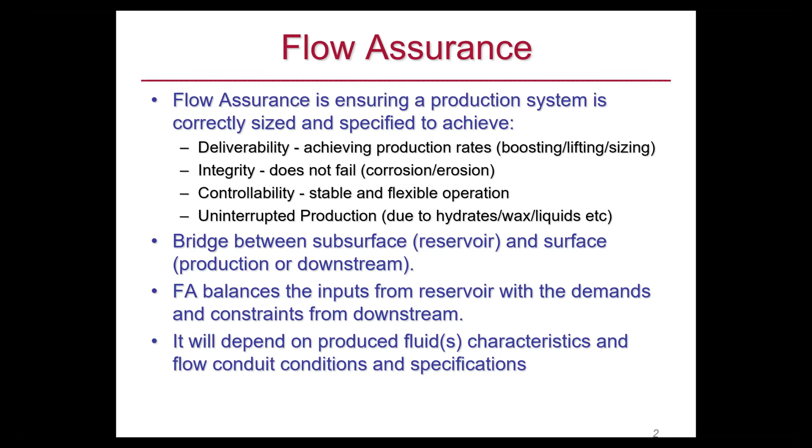So the question for a flow assurance engineer is: do we have gas or oil? Do we expect water production? What lab tests do we need to do? Are the fluids untreated or treated?

Do we need processing? Because obviously you can do processing at the point of production, and then reduce your worries about flow assurance. But most of the time it's not cost effective, especially offshore.

And there is the distance between the receiving facilities and where we are producing - that plays a major role. The longer the distance, the more flow assurance problems you can expect.

And then ambient conditions - what are the different constraints we have? Pressure, temperature, and receiving facilities.

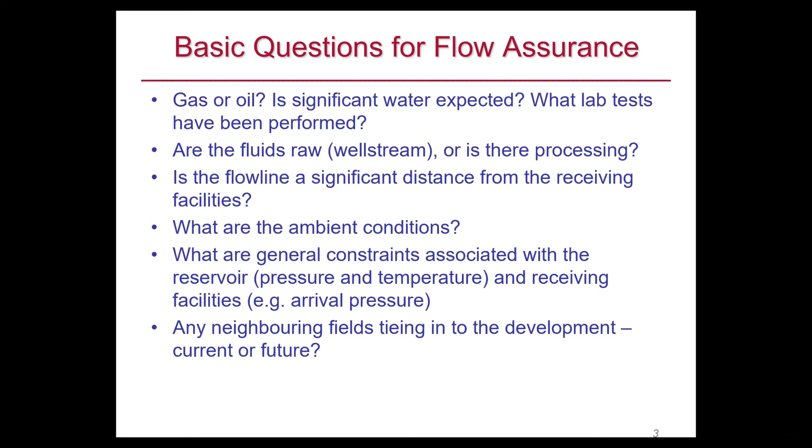And normally, when we have a major reservoir, there are some smaller reservoirs nearby, because you can have different anticlines, and the oil and gas can go to different anticlines.

So flow assurance will include hydrate, corrosion, wax, asphaltene, scale, sand production, and other issues like emulsion and foaming. So you see it is a large area, and it is fantastic.

And you know, that's why when I started my work, it was not called flow assurance. But now I'm very happy to see it as a separate job category, and petroleum engineering is also defined as a different category.

And heat transfer, hydraulics, and then steady state production, shutdown, and startup - three conditions. A startup has different issues, a steady state has different issues, shutdown has different issues. So you need to address all three conditions.

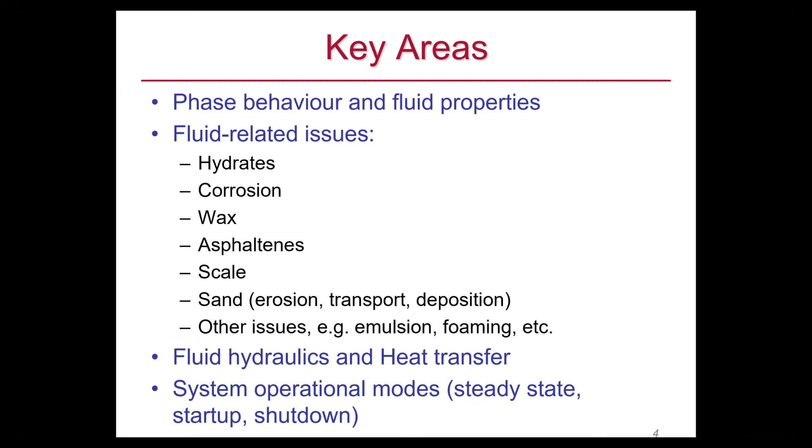And the phase envelope is very important - the fluid phase envelope is very important. So we need to basically plot this phase envelope. Are you familiar with phase envelope?

Yes, we are in the process, yes. And normally, basically, the phase envelope depends if you have the composition. If you have the composition, you can plot the phase envelope. The problem is that for...

components that are heavier than C7 plus, we don't know their critical temperature and pressure and acentric factor, because we need these three parameters - critical pressure, critical temperature, and acentric factor - to model the system. And therefore, normally our prediction is wrong.

And that's why we need lab tests to measure bubble point, dew point, or different properties, and then tune the equation of state to match this condition. So here we are matching the bubble point.

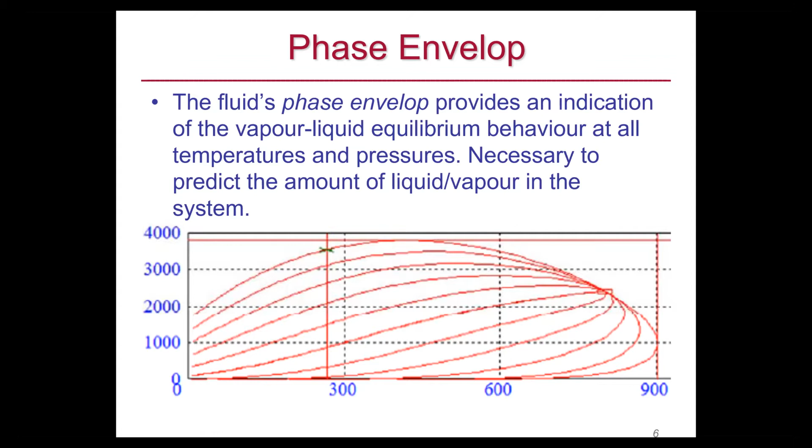It is very important - the first thing you need to do is plot the phase envelope. And then once you know the phase envelope, now you are producing from this reservoir. Reservoir condition is here, initially above saturation pressure, and then it goes inside. When the condition goes inside the two-phase region, the fluid becomes two phases.

Now you have gas, liquid, and maybe three phases. You can have water, or four phases - you can have wax, asphaltene, so you can have different problems.

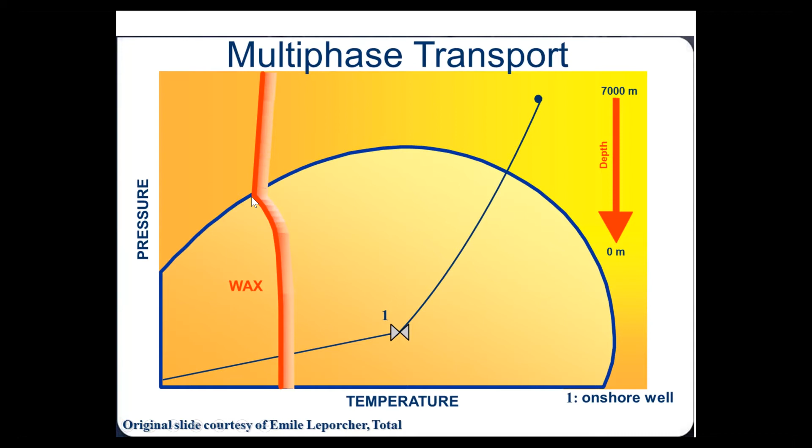So now you have a certain path you have chosen, for example, and you need to plot the wax condition. This is the wax condition, and at the bubble point - that's the reason we need to plot this phase envelope correctly - because at the bubble point, below the bubble point, if you increase pressure...

If you increase pressure, the amount of light component will be increased in the liquid hydrocarbon phase, and that will reduce the concentration of heavy component. Therefore, wax formation will be more difficult, and you need to cool down more.

At bubble point, there is no gas. So when you increase pressure above bubble point, the liquid oil conversion to wax, the volume is reduced. Also, increasing pressure will reduce the volume. If you have a fluid and you apply pressure, the volume is reduced. So you see that wax formation and pressure increase are in the same direction.

That's why you see that the phase envelope for wax shifts to the right, while below bubble point it shifts to the left. So knowing the bubble point is very important to plot this correctly, and that's why we need to first tune the equation of state to match the bubble point.

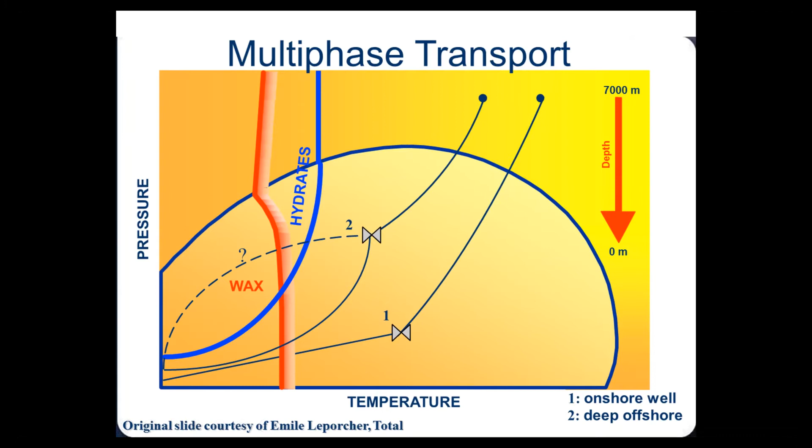Now this is the asphaltene phase envelope. This is upper asphaltene onset, this is lower asphaltene onset, and we need to plot this one too. Then scale formation - these are different scale formations. You need the full figure to predict things, and this is viscosity increase.

Below bubble point, as you reduce pressure, the viscosity increases. So you see that you need to have the prediction for all of this to be able to predict what sort of problem you have, and decide which way to move and how to solve the problem.

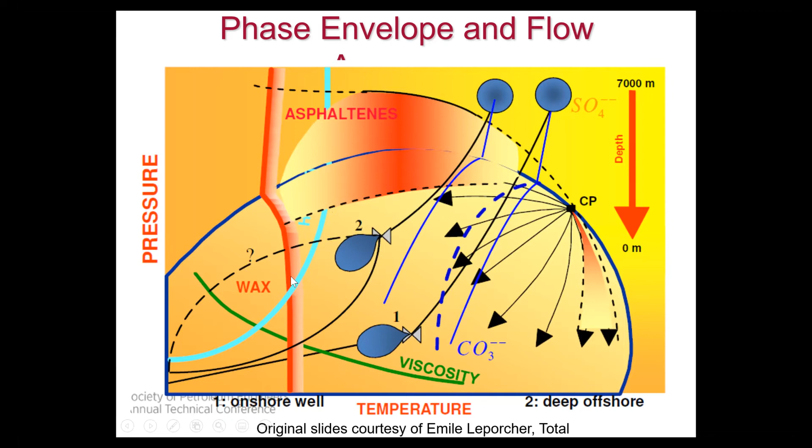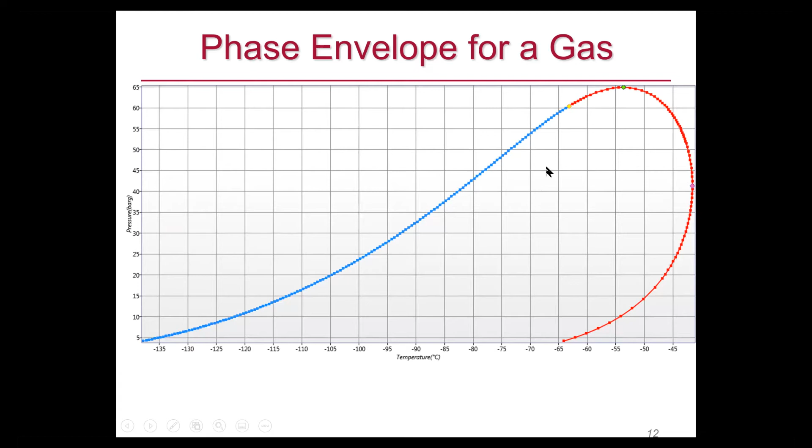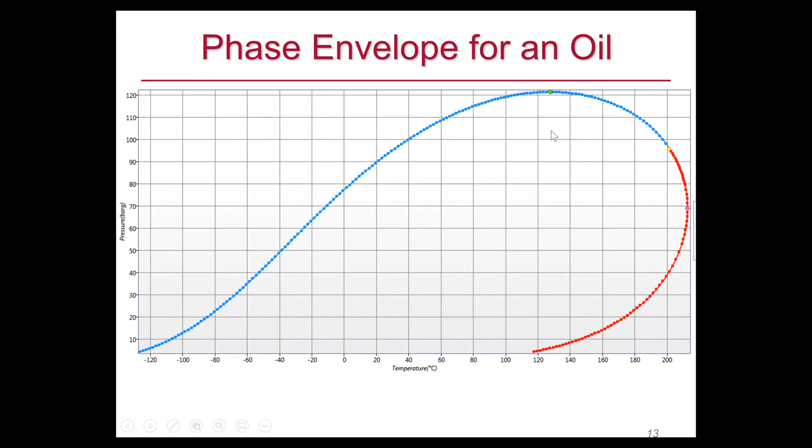And then when we are producing, the pressure will drop. In the reservoir, pressure drops like here, and then as we produce, it moves this way. So we can have all sorts of problems. That's the reason we need to plot this - this figure is very important.

Here you see first the phase envelope. The first thing you need to do is tune and match the phase envelope. That's why lab data is important.

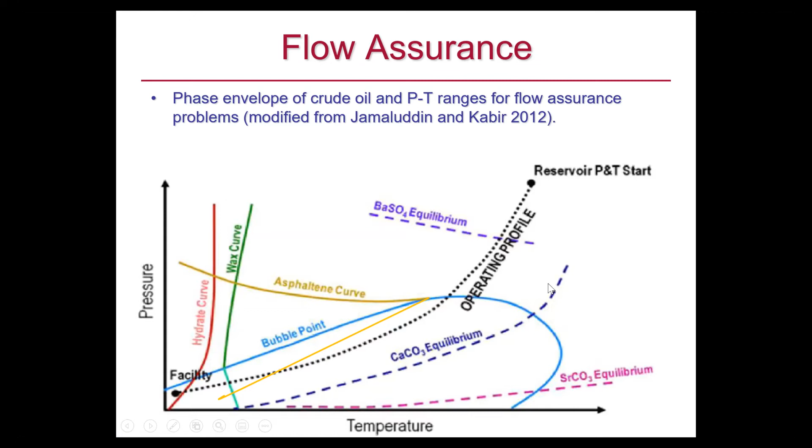You see that here, if you move this way, you have an asphaltene problem, but if you move this way, you don't have an asphaltene problem. At the very end, you might have some asphaltene problem, but also a wax problem, and here you have a hydrate problem. And the operating condition goes into barium problem here, and you don't have the calcium carbonate. You can see all sorts of problems you can have.

Is this clear for everybody so far? Yes sir, I think yes. Excellent.

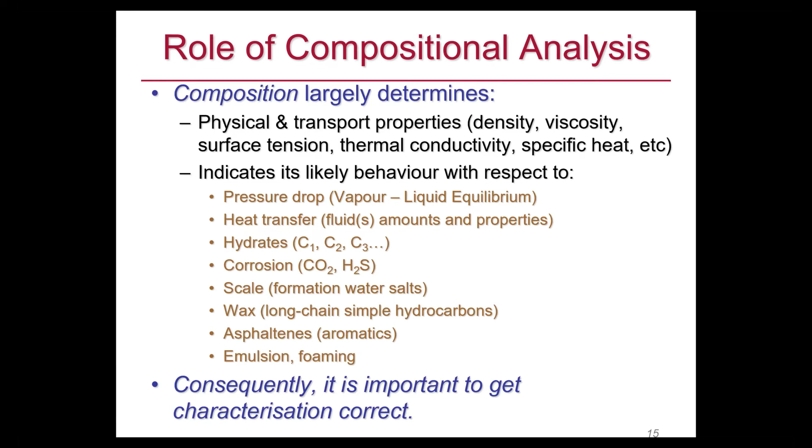So, depending on what sort of problem we have, we need to consider mitigation, prevention, or using inhibitors and things like that. First, the point is that we need to have characterization - grouping the pseudo components into different groups and then defining critical properties and acentric factor to match the experimental data. So here we discuss hydrate, wax, asphaltene, scale, foam, and emulsion.

Hydrate. Hydrates are what they are - components similar to ice. They look like ice, but the difference is that they have a lot of gas inside them, and they can form at temperatures much higher than 0.

We can have hydrate, depending on gas composition, at 20 degrees. So that's the big - there are two big differences between hydrate and ice: hydrate can form at temperature above 0, and it has a lot of gas inside them.

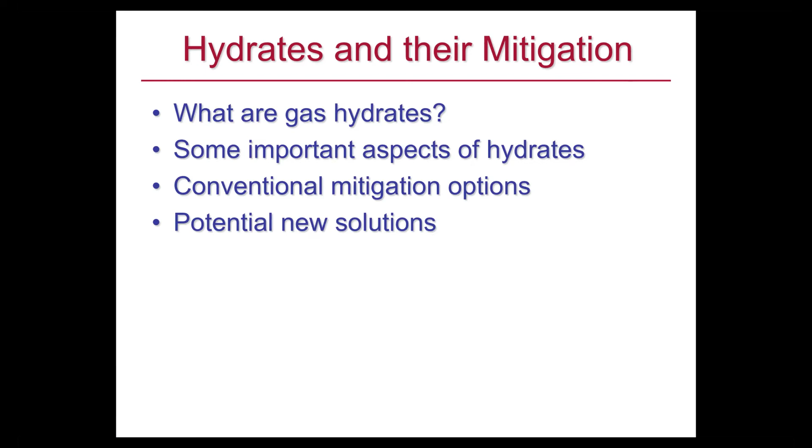Here we discuss the aspects and conventional mitigation options, potentially new solutions. So each molecule, each compound can be in 4 stages.

We know 3 stages, but let me explain. First of all, gas state - when the molecules are separated from each other. When they are separated, it doesn't matter which molecule is there, because they don't have a lot of interaction. For example, water can go inside the gas molecules, between the gas molecules.

In gas state, the molecules will fill the container, completely fill the space available. If you increase pressure, the same thing happens - they will completely fill it. Imagine you have a bottle of water, remove the water, now you only have air there, and everywhere is the same - it completely fills this space.

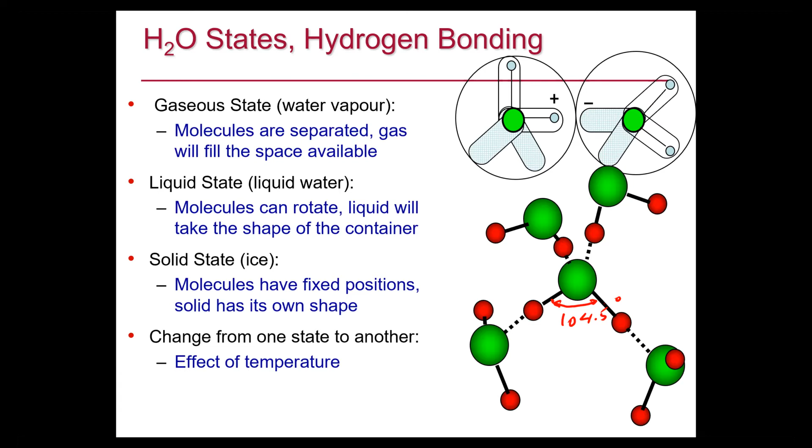So the angle here, 104.5 degrees, okay, so it's like a Lego game. With Lego games, you can make certain shapes, you cannot make any shape. You have certain shapes, and the molecules do not move towards each other.

What happens? The hydrogen bonding force is there, but the van der Waals force depends on how big the molecule is. If the molecule is big, then it's closer. If it is too big, they repel each other. If it is too small, the force is less.

So hydrate formation depends on which type of gas molecule we have. For example, C3 is a good molecule, IC4 is a good molecule - they are spherical, the right size. But N2 is very small, C1 is very small, C2 is better.

CO2 is polar, so it is good. H2S is polar as well, good. They can promote hydrate formation. So the position of this hydrate phase envelope depends on the composition of the gas. Normally the best molecule is cyclopentane, for example, because it's spherical and a good size. But cyclohexane is slightly bigger, so it is more difficult for cyclohexane to form hydrate.

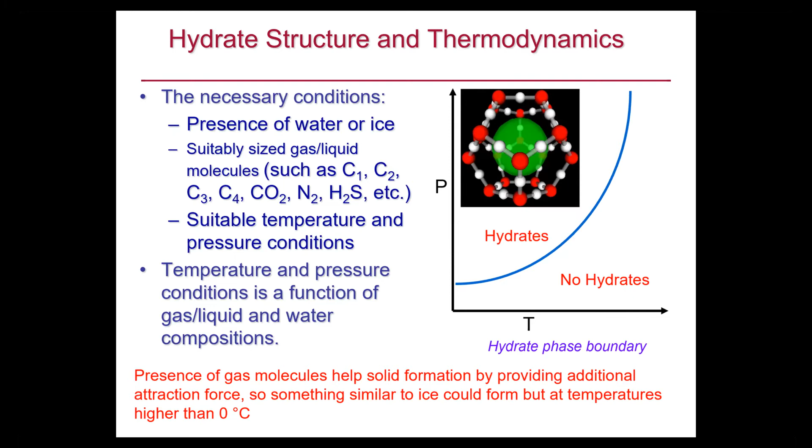So the important point in the hydrate problem is plotting the hydrate phase boundary. And we can do it experimentally or through modeling, or both. We have the necessary equipment and facilities to do that at our university and company.

The connection is gone. I assume you can hear me. Can you see the video? You should be able to see the video now. We can see it, but we can't hear it. No, there's no voice there.

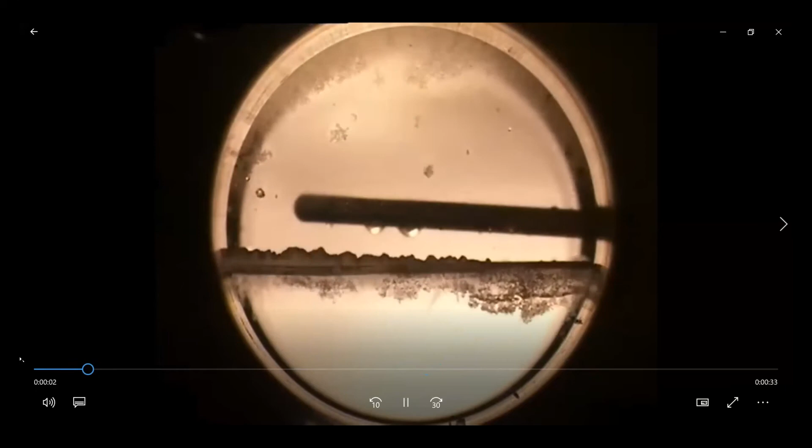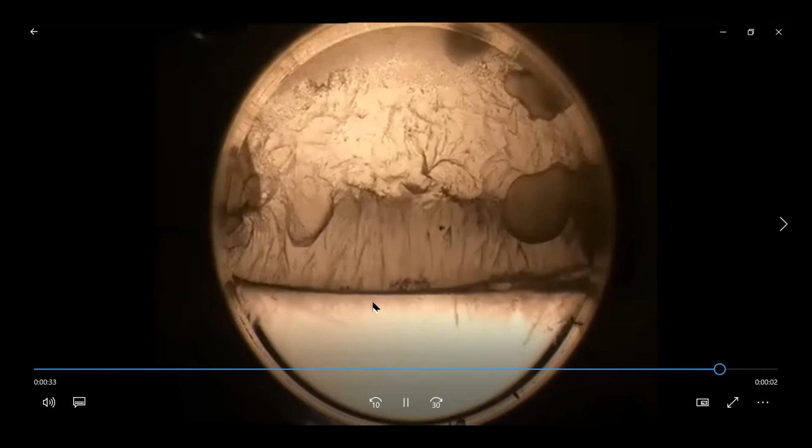Okay, yeah. You see that hydrate is forming at the interface, and here it was wetted by water. But you see that the interface works as a barrier. You see that the liquid remains as liquid water, and there are some streaks going inside, and that's why in shut-in conditions, you might have this sort of condition where the hydrate formed at the interface and works like a barrier for further hydrate formation. And then when you start up, that barrier is removed and it can block the whole pipe.

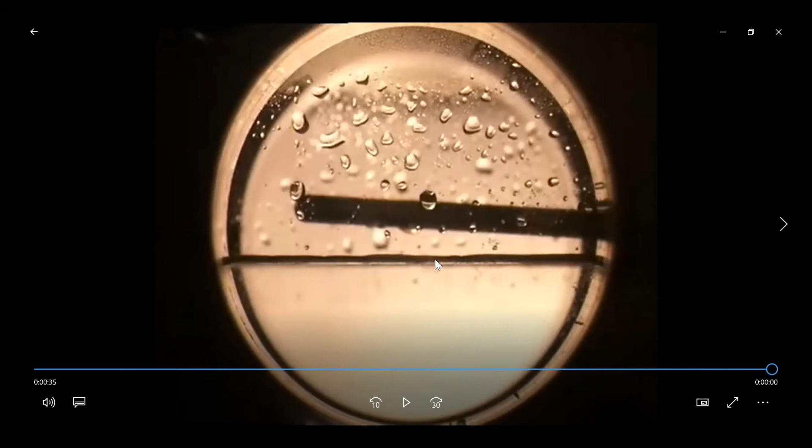And hydrate is a source of energy, a source of energy. So we can look at...

Can you see the video? No, we can hear something, but we can't see it. Okay, one second. The magic of hydrate - now, yes, we can see it.

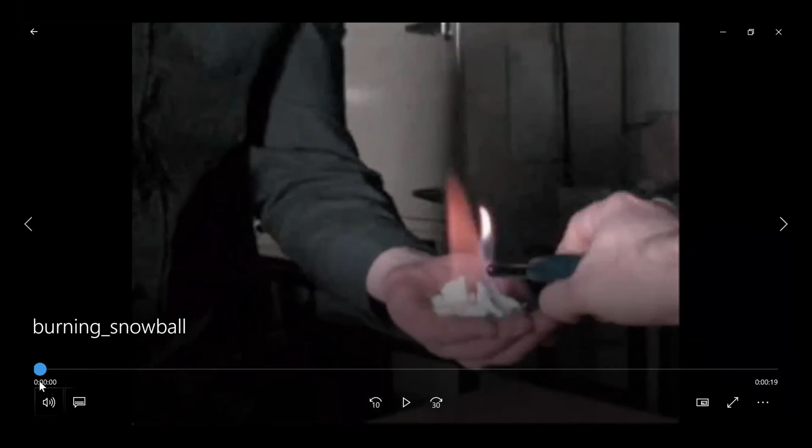I play a role in this video. What is my role? This is one of my staff and students. See that, water is dropping, and my role was - that is my hand. You see, I have the lighter.

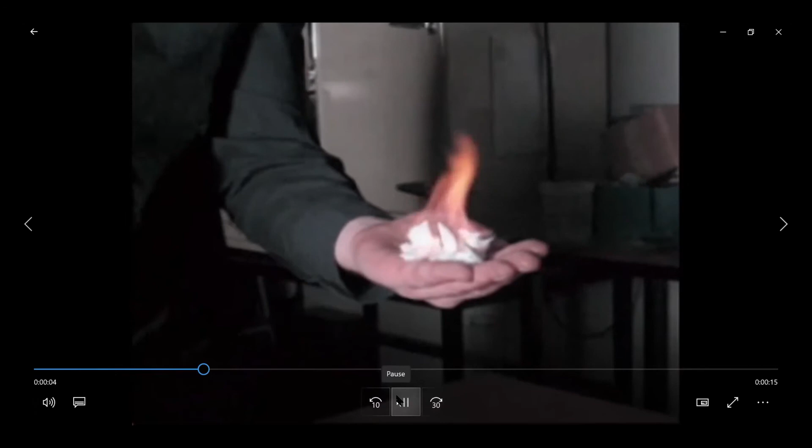That was a program we created for this geology TV channel, National Geographic TV channel, and my friend has a very good Scottish accent, and he did the presentation. If you are interested, I can show you more.

In the 1980s, geologists started scanning the continental shelves and slopes with side-scan sonar. They found them riddled with strange features: giant craters thought to form when gas suddenly escapes from the sea floor. Some people even speculate that escaping gas could sink ships and may explain the mysteries of the Bermuda Triangle.

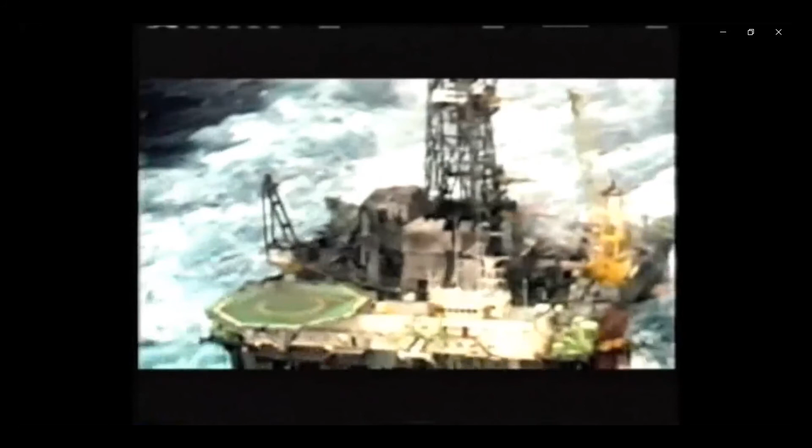Gas escapes are certainly dangerous. This oil rig off the coast of Norway is sinking into a bubbling sea of gas, after the rig's drill hit a pocket of methane gas.

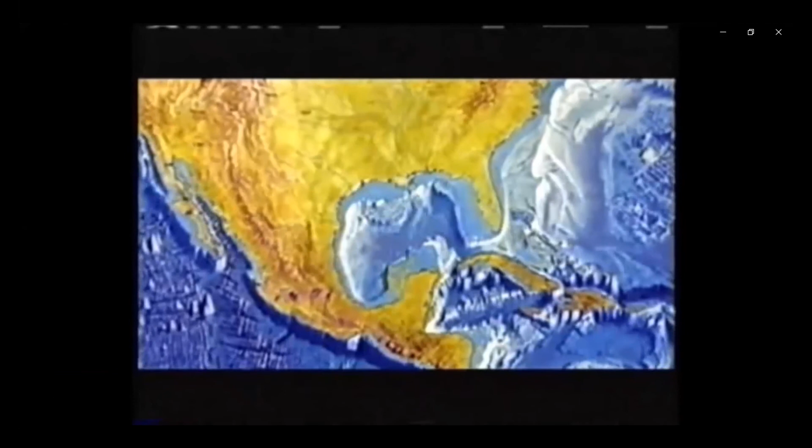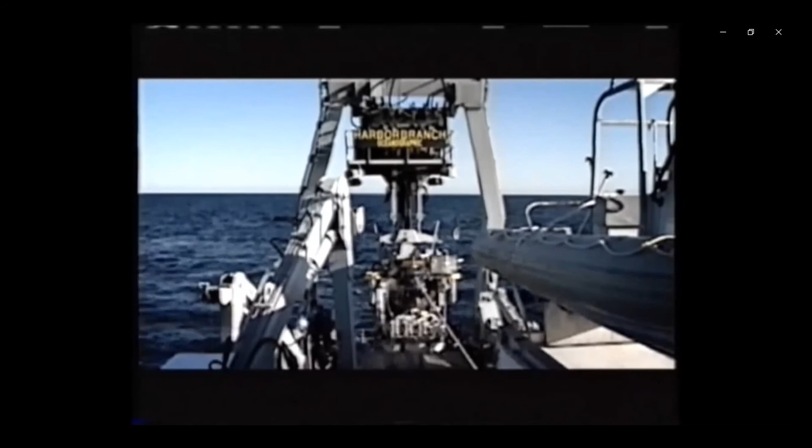Hazards like this send geologists racing to explore the seafloor. On the edge of the continental shelf in the Gulf of Mexico, a team of scientists prepare to dive, their mission to investigate a strange substance that could be causing gas emissions from the seabed. Protected inside the 5-inch thick acrylic sphere of the Johnson Sea Link submarine, they plunge to the continental slope.

1,800 feet down, they find what they're looking for: a mound of a yellowish-white icy substance called methane hydrate. It forms under intense pressure at depths greater than 1,000 feet, and it contains gas.

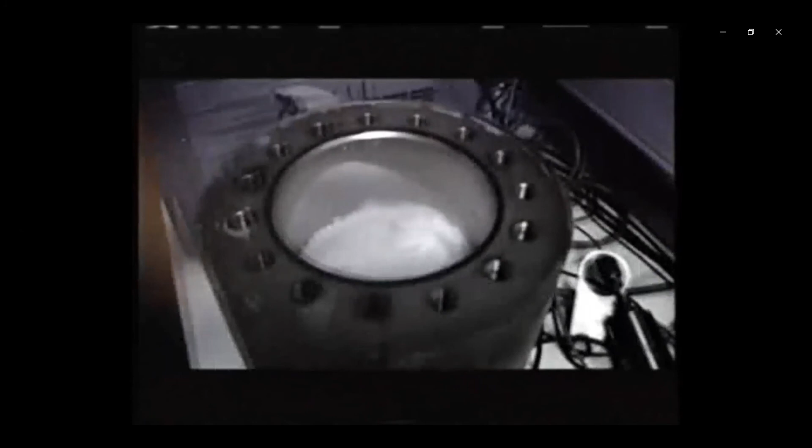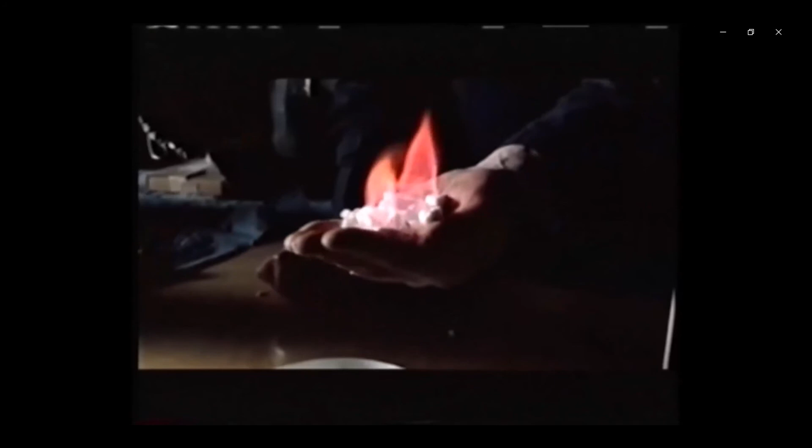This gas burns, but don't try this at home. It's actually slightly warm, but the cold water, as it melts, is cooling my hand. So right underneath it, it feels very cold, in fact, but I can feel the warmth of the flames where my hand is dry.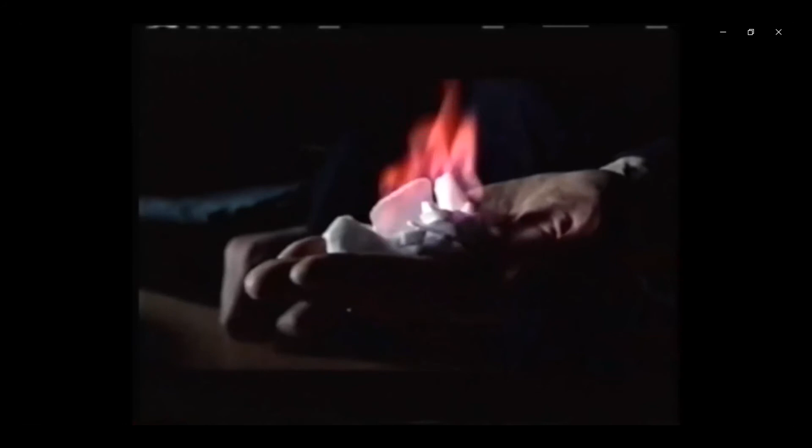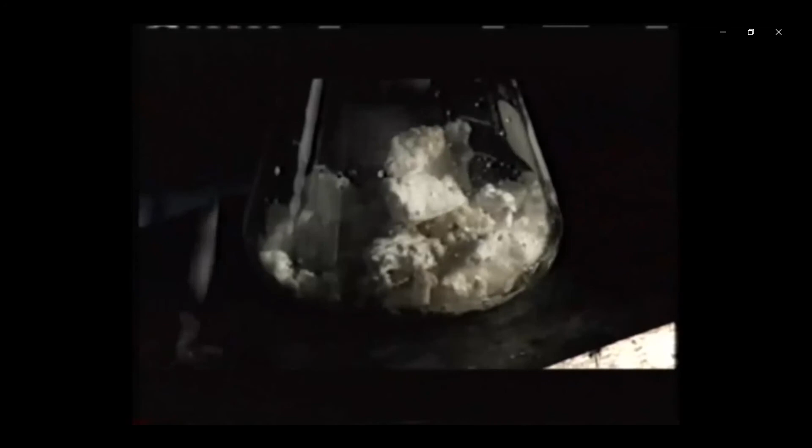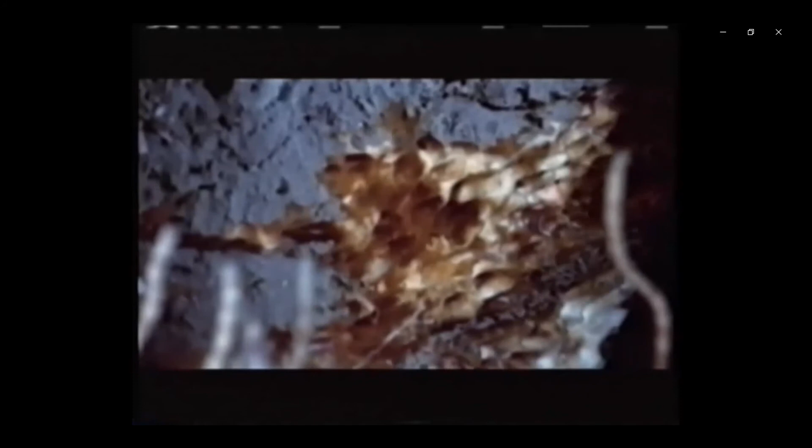Methane hydrate holds so much gas that every cubic inch of ice releases 160 cubic inches of methane. Deep down on the continental slope, the gas is normally safely locked up in the methane hydrate. But if the temperature or pressure change, the hydrate can melt and the gas escapes, and its sudden release can cause blowout craters.

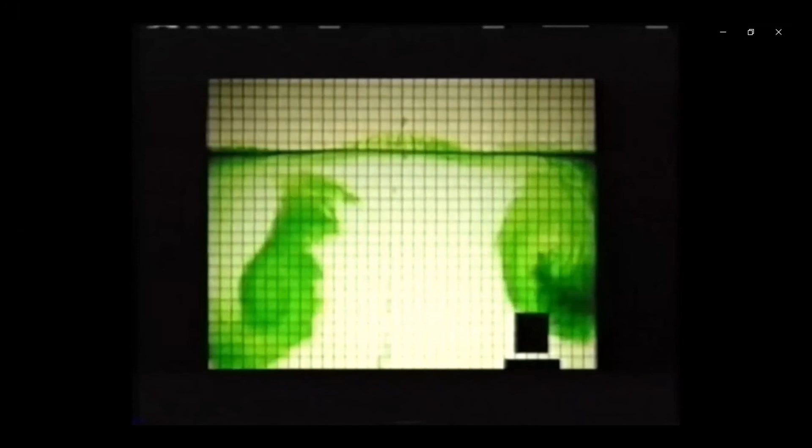But some people think it could do far worse. Research suggests it could sink a ship. At Monash University in Australia, physicists carry out an experiment in a test tank. They launch a bubble at a scale model boat. If the boat's in the wrong place at the wrong time, it sinks, again and again.

No one has ever reported a ship sunk by a gas bubble, but some people think methane hydrate might explain the disappearance of ships in the Bermuda Triangle.

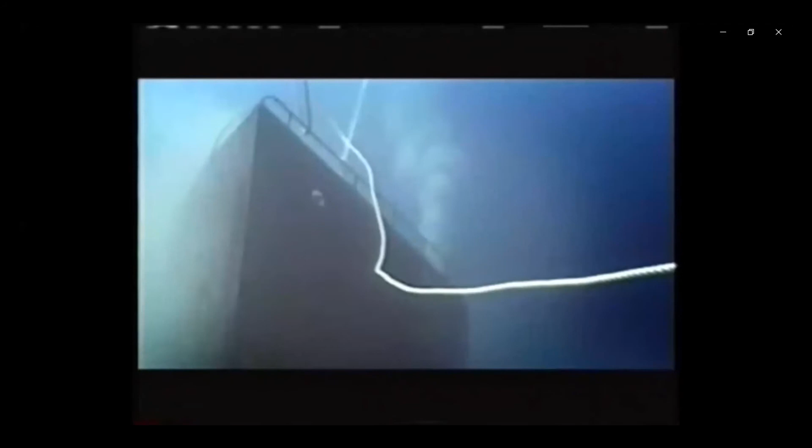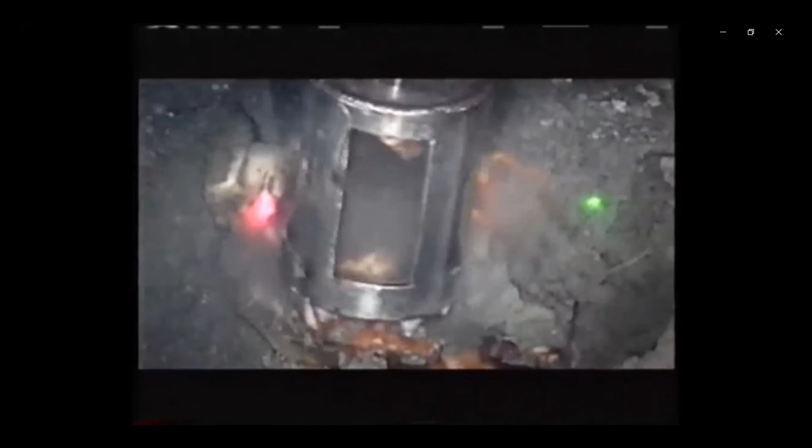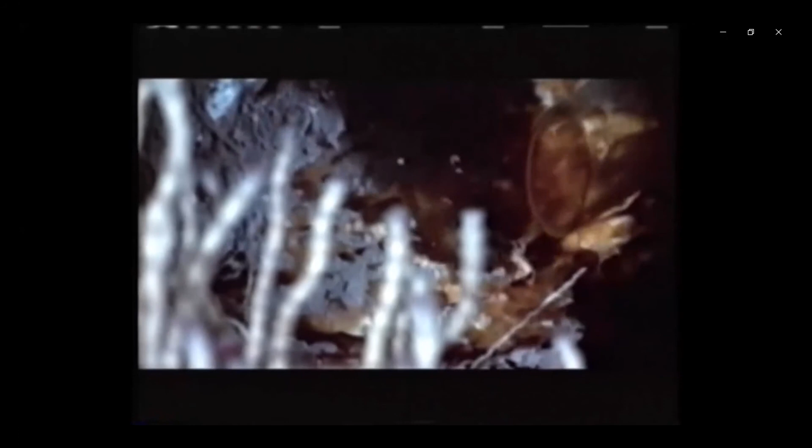And methane hydrate is grabbing attention for another reason. Around the world, it's estimated there are up to 400 million trillion cubic feet of methane hydrate buried in the continental shelves and elsewhere in the ocean. By some estimates, that's more than twice as much energy as all the world's oil, gas, and coal reserves. It's difficult to extract, but this strange substance could be the fuel source for the future.

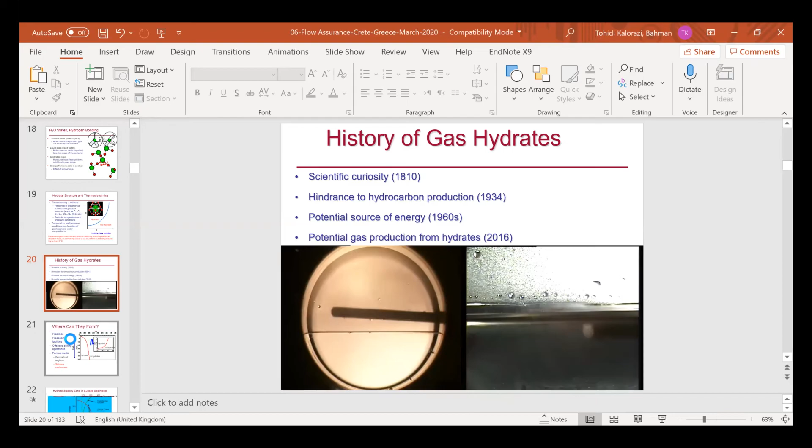Okay, so now the point that we mentioned about hydrate in sediment, this is the hydrate phase boundary, pressure and temperature. And in water, in the ocean, this depth of water is pressure, isn't it? For every 10 meters of water, the pressure increases by 1 bar.

So 3,000 meters is 300 bar. That's the way we calculated pressure in the reservoir. And imagine this is temperature. If you rotate this figure, you get this.

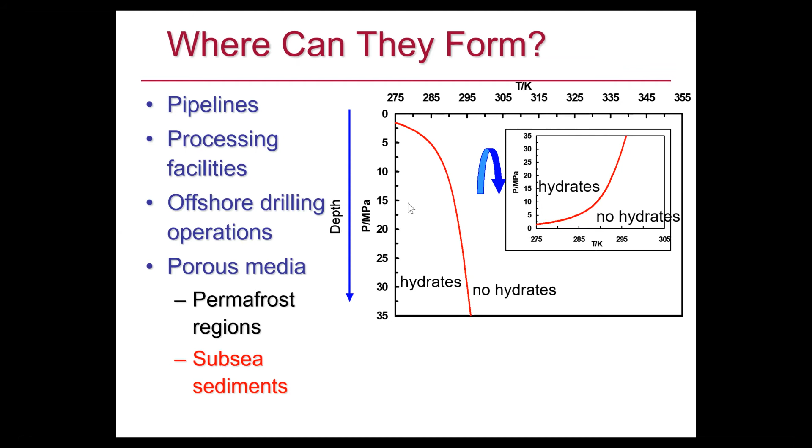So the hydrate phase boundary would be this area. Now, this is the area where hydrate can form, the temperature and pressure conditions. But instead of pressure, it's depth, because depth has the same effect. And this is the temperature.

Surface temperature is high, and then subsea temperature is low, here 4 degrees. 4 degrees is normally the sea bottom temperature, because 4 degree water is the heaviest water. And this is the geothermal temperature gradient, temperature increases by 30 degrees Celsius per kilometer.

So you see that hydrate can form here. This is the hydrate condition, inside hydrate, and then up to here, up to here can form hydrates. From here, what depth? Around 500 meters, and then depending on conditions it can be more, but this is the area where hydrate can form.

For hydrate formation, we need 3 conditions: we need the right temperature, the right pressure, and the water will create the pressure, and temperature profile. And then we need presence of water—we have plenty of water—but what else we need is presence of gas molecules.

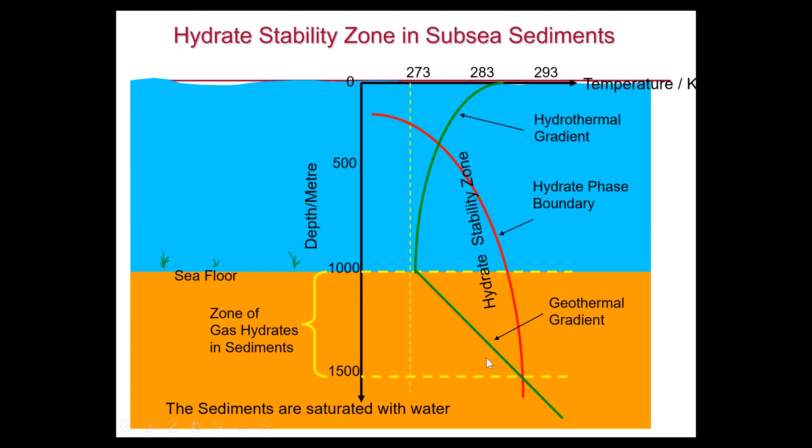And the gas is produced here and will be trapped in form of hydrate. But gas here, although hydrate can form, because hydrate is lighter than water, it moves upward and comes out of the hydrate zone and dissociates. So in the sediment we can have hydrate - this is permafrost. Surface temperature is sub-zero, and then this is the hydrate stability zone. Here is 0, and temperature versus depth, the slope will change. But you see that again we have a region that hydrate can form.

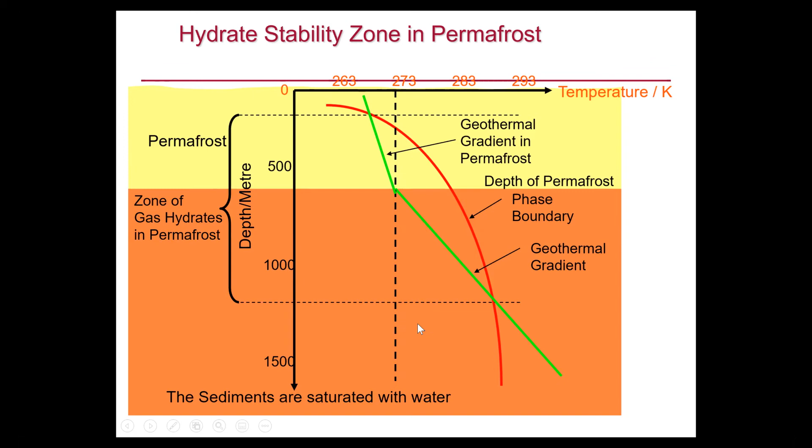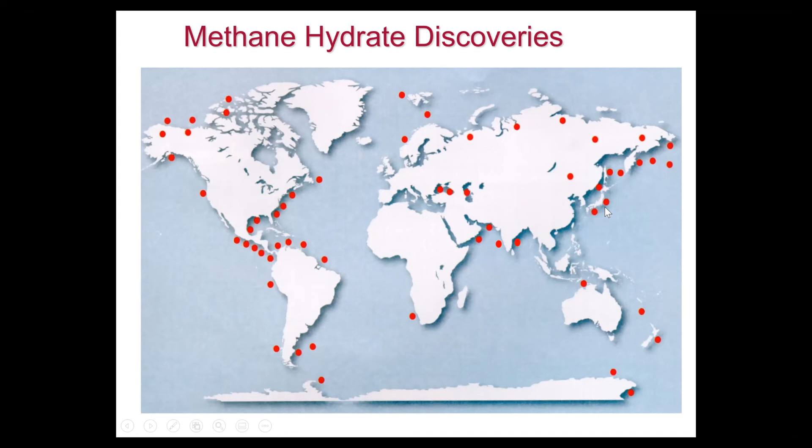This is another video, not connected, but we can find a lot of places around the world that can form hydrate. You see that Mediterranean Sea is not that deep, but Black Sea is deep enough to form hydrate - needs to be more than 500 meters. And you see these are the places around India. They found some new ones in China and Japan, and many other places.

And the amount of carbon in gas hydrate is twice all recoverable and non-recoverable oil and gas and coal. So 10,000 gigaton carbon, and here is 5,000. Some people say it can play a major role in gas supply.

But I'm not sure at the moment, because although it is a stepping stone, we are moving away from hydrocarbon reservoirs. Initially we'd be moving away from coal, then oil, then gas, but they won't be completely removed, because before coal we were using wood, and still there are some places that use it. So there would be a mixture of various energy sources.

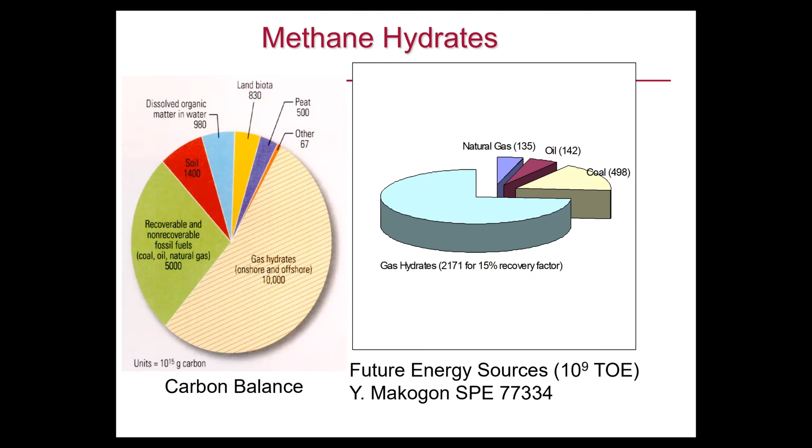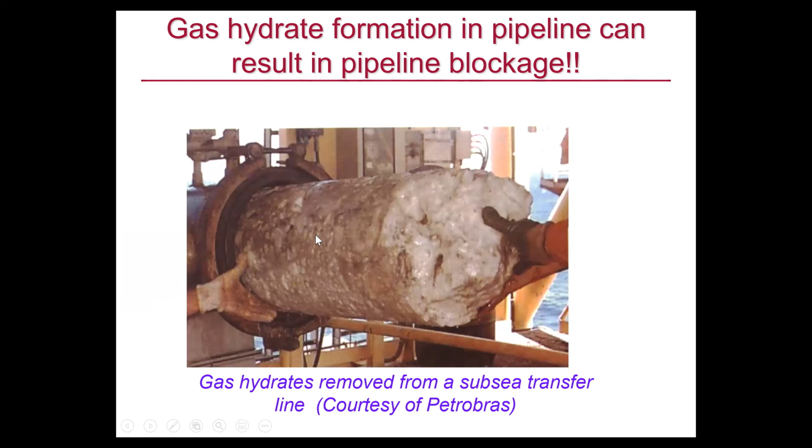And I show this video - hydrate formation in the pipeline can happen. This is a pig receiver and it can block the line altogether.

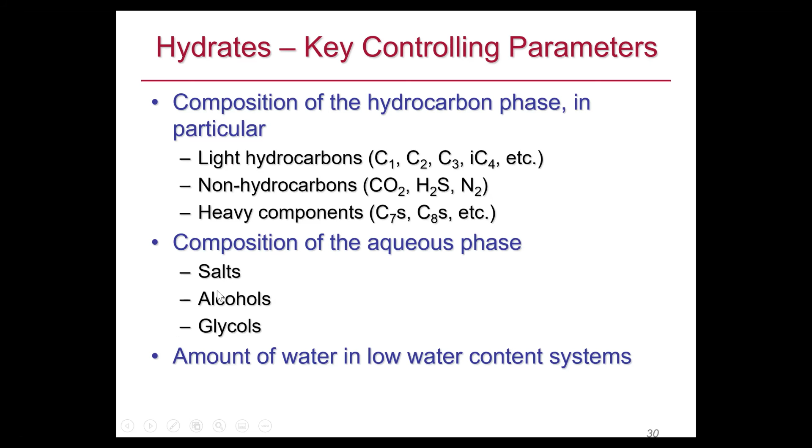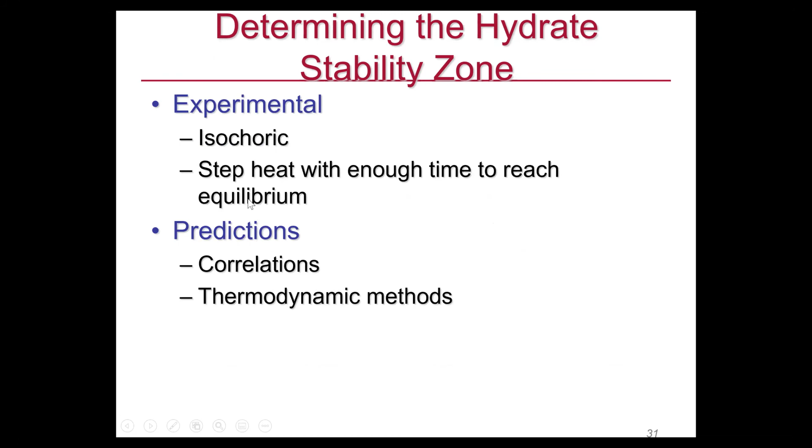So we need to have this information - light component, non-hydrocarbon, heavy component - and we need to know whether we have salt or alcohol, because they will affect hydrocarbon. This compound will affect the aqueous phase, and this aqueous phase dissolves this component and shifts the hydrate phase boundary to the left. There are different techniques to test and find the hydrate phase boundary, and correlation, thermodynamic model, and the options for avoiding hydrate problems - these are the main options.

Water removal, dehydration, increasing system temperature by insulation and heating, reducing the system pressure, injection of thermodynamic inhibitor, and using this new category of low dosage hydrate inhibitor, kinetic hydrate inhibitor, antiagglomerant, and various combinations of the two.

And there is a new - I won't say new, around 20 years old - concept, cold flow, that if you are interested, we can discuss after the lunch break. I think I'll stop here.

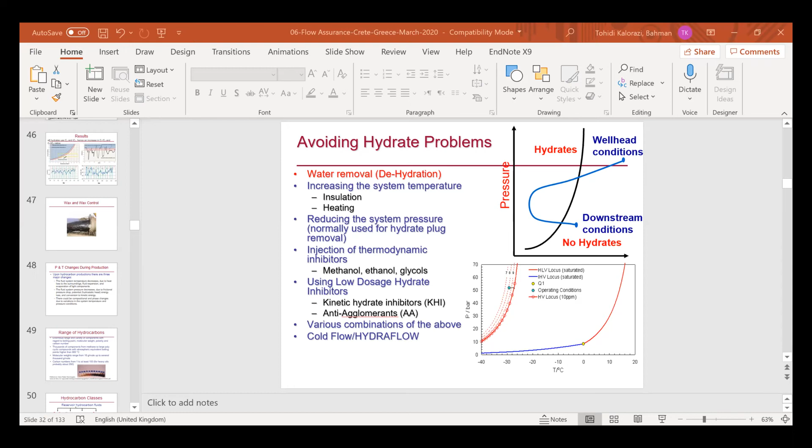So in general, these are the main options for avoiding hydrate problems. And we discussed this option, not all of them, but the ones where the name shows what we mean - because if you remove water, then obviously the hydrate phase boundary shifts to the left, and the more water you remove, it should move to the left even further.

So that's one. The other one is maintaining the temperature, that is by insulation or heating. We can reduce the pressure - that will move from outside the hydrate phase envelope. But pressure is energy, we don't want to lose energy. So this option is normally kept if we want to have a blockage and we want to remove the blockage.

The other one is injection of thermodynamic inhibitor. Thermodynamic inhibitors are the inhibitors that basically shift the hydrate phase boundary to the left because they dissolve in water - because some water molecules are busy dissolving this inhibitor, so there would be less water for forming hydrate.

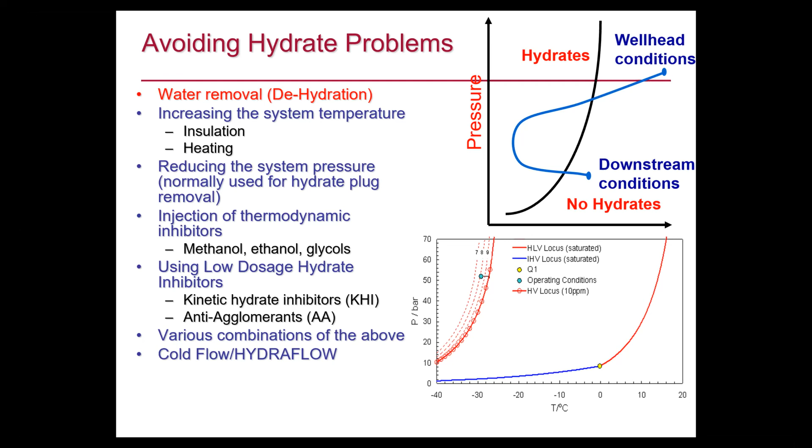This is a hydrate phase boundary of a gas mixture, and this is our operating point. You can see that at the moment, the operating point is inside the hydrate phase boundary.

And obviously, if you add inhibitor, for example methanol, 10% methanol shifts the hydrate phase boundary here, 20% shifts it here, 30% shifts it here, but 30% is, to some extent, more than what we require. You can see that 26% is the exact number you want. Obviously, we also sometimes include a safety margin.

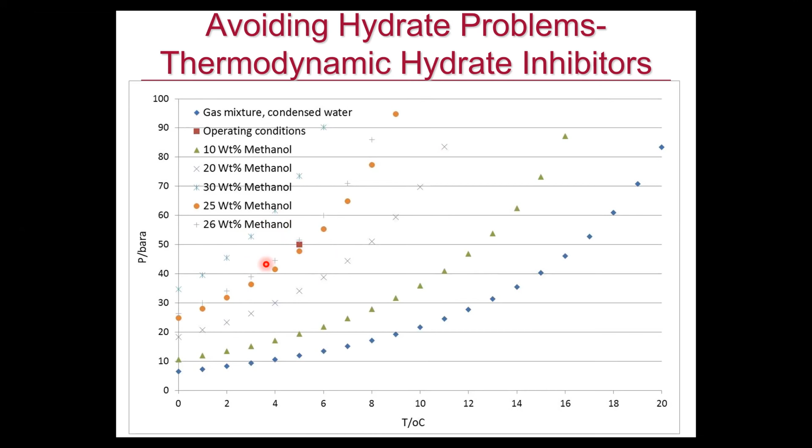Avoiding hydrate using kinetic hydrate inhibitor - the common understanding is that they prevent hydrate formation for a period of time. The way we test it, we put it in a cell and reduce the cell temperature. The temperature here is 4 degrees, which is the seabed temperature. Then you see the pressure drop because the temperature drop will contract the gas.

But you see that the pressure remains constant for, let's say, 1200 minutes, which is equivalent to 20 hours. So this chemical can prevent hydrate formation for 20 hours. If the residence time of oil and gas and hydrocarbon in the pipeline is less than 20 hours, then that's fine. This inhibitor will prevent hydrate formation for 20 hours.

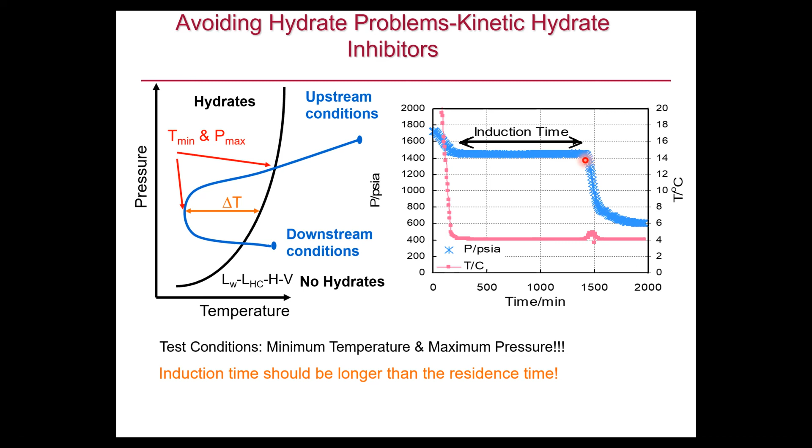This is the old fashioned way of testing, but we now understand that it is not as simple as that, and we can basically understand it better.

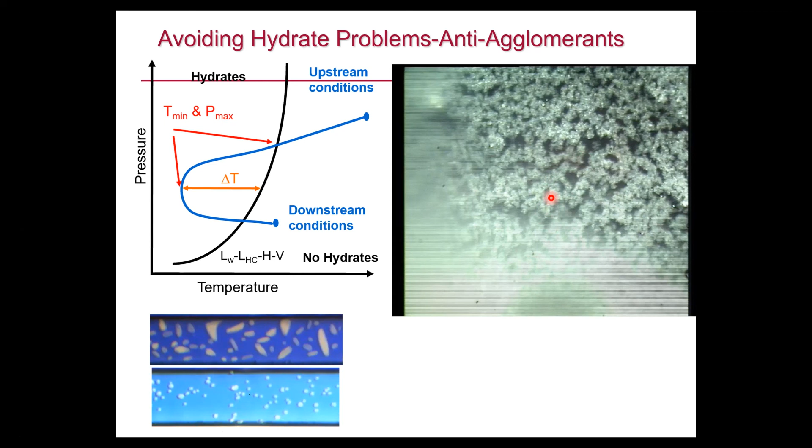Anti-agglomerant - what they do, they do not prevent hydrate formation. This is without anti-agglomerant, you see that the crystals are sticking to each other. This is with anti-agglomerant, you see small crystals here, and small crystals here. So they are also being used, but they are mainly used in the United States.

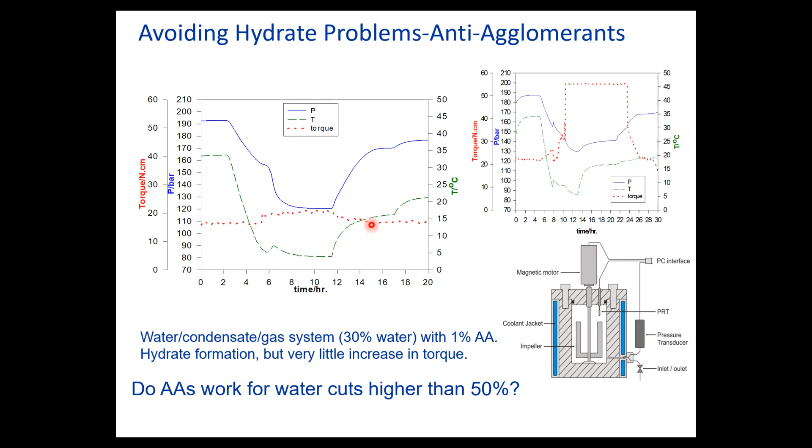Now, we have developed some new devices for monitoring hydrate problems and monitoring hydrate safety margin. But in general, as we discussed, for plotting or drawing the hydrate stability zone, you need two pieces of information: the hydrocarbon phase and the aqueous phase. The hydrocarbon phase doesn't change in short periods of time. If you have a reservoir, its composition does not change very quickly.

But the water composition can change very quickly. The amount of salt can increase, and the inhibitor we inject is a certain amount. If the water cut changes, the concentration of inhibitor drops, and the system can go into the hydrate region, causing blockage. So what we do here, since we know the hydrocarbon phase, we need to find the aqueous phase.

And these are the reasons: system or human error, and some equipment may stop working. We don't always know the water cut, changes in pressure and temperature, or the inhibitor we are buying or producing may not be the purity that is written in the design basis.

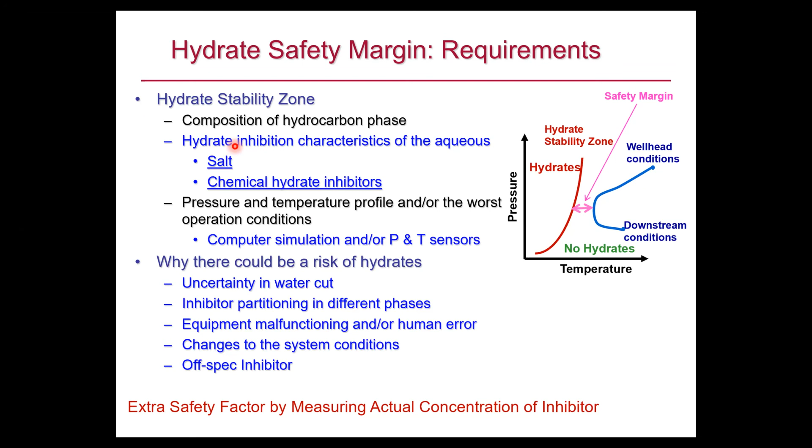Basically what we need is a quick system for measuring water composition. You can send it to the lab, but it takes time to get results back. So this is the device that we have developed.

We measure electrical conductivity and we measure the speed of sound. With these two measurements, we can find two unknowns: salt, and thermodynamic or kinetic inhibitor. It only takes 5 seconds, so it's very quick and basically real time.

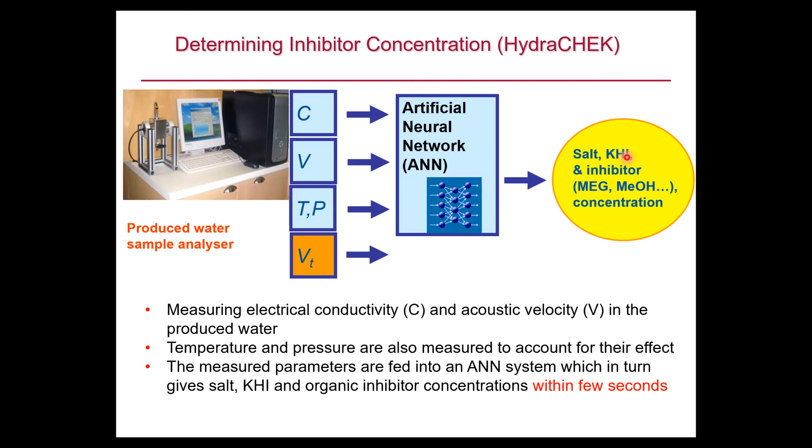From that, we know hydrocarbon composition and water composition, then we can plot the hydrate phase boundary. Then we can use monitoring devices or computer programs like Olga to find the pipeline condition, pressure and temperature. Ideally, you want to keep the pipeline condition outside the hydrate phase boundary.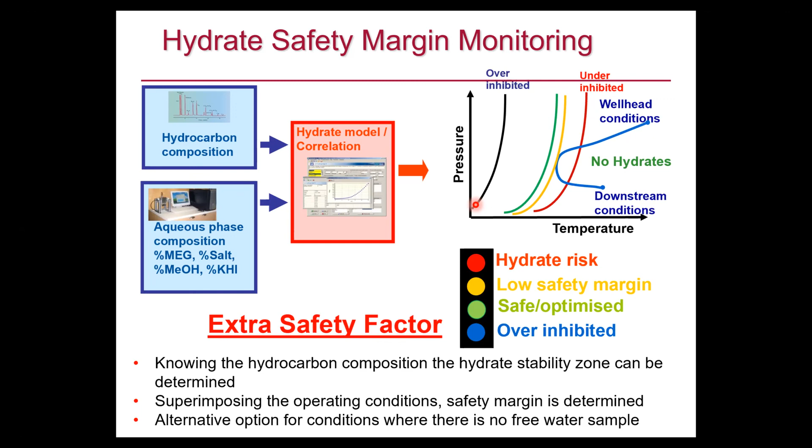So this device has been used, resulting in savings of hundreds of millions of pounds in inhibitor and production costs. In one case, it increased the production from one reservoir by 5 years.

This resulted in the university winning the Queen's Anniversary Prize in 2015, and I was there at Buckingham Palace. If you are interested, I can send you the video. The university got the award on behalf of all the researchers, but it was a brilliant moment.

And here is some of the publications that have been published.

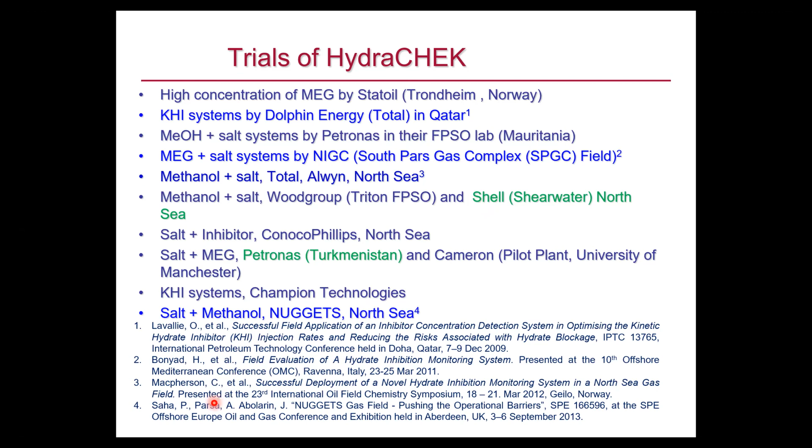The other device we have developed is HydroSense, for early signs of hydrate formation. Different components have different affinities to form hydrate. You see that isobutane is strongest at forming hydrate, then propane, then ethane, then methane.

So when hydrates form, the concentration of these gases in the gas phase will be reduced because some of them have formed hydrate, and hydrate density is similar to water density. So hydrate will follow with water, they don't travel in the gas phase, but the gas phase composition has changed.

This is the point I mentioned earlier. Imagine two molecules, one here, one far away here - this can be gas and water. When they are far away, interaction is zero, there is no interaction between them.

When they get a bit closer, it results in a shift of charges on the molecules. Imagine two molecules: when they get close to each other, their shape will change, and one becomes positive and the other negative, so they attract each other. That attraction depends on size. In the case of hydrate, the molecule cannot move; just the size of the molecule determines where we are.

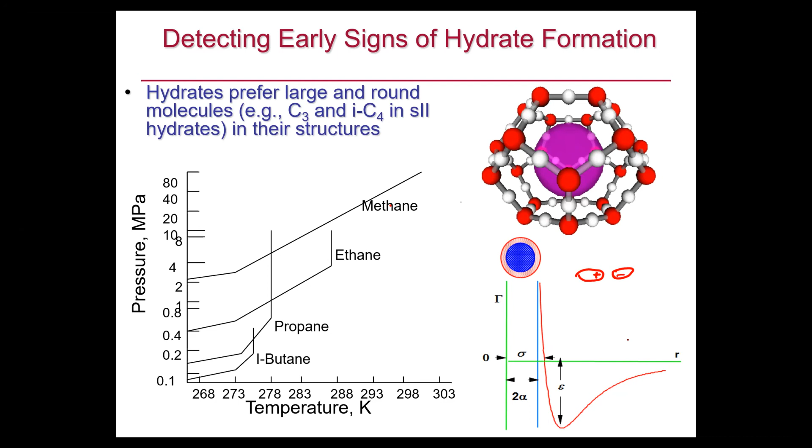A little bit like human beings, you know? There is an optimum distance to keep peace and quiet. When they get too close, then they repel each other. Just a joke, okay?

This is usage of this device in a gas field in France. Here, the gas production comes to a vertical separator. The gas - there's a mesh here - goes to the top, liquid goes here, liquid and water together, condensate and water together. Normally they have a blockage problem here.

They initially used methanol, but once the concentration of water increased, methanol was not cost effective. They used anti-agglomerant to prevent hydrate blockage. But at the same time, Total was a sponsor - they used this device and put it here to monitor the composition of the gas.

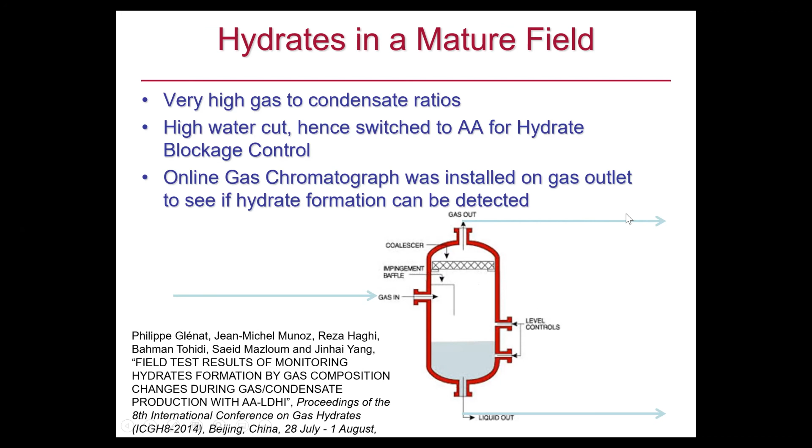And this is the result: C1 to C3, C1 to IC4. If hydrate forms, the concentration of C3 will be reduced in the gas phase because the hydrate absorbs the C3, and the concentration of IC4 is also reduced. Because they have to add up to 100%, the concentration of methane will increase.

So this moves upward, okay? When hydrates form, this ratio will increase, and when hydrate melts, the ratio reduces and then increases. They were a bit confused why it was increasing and dropping.

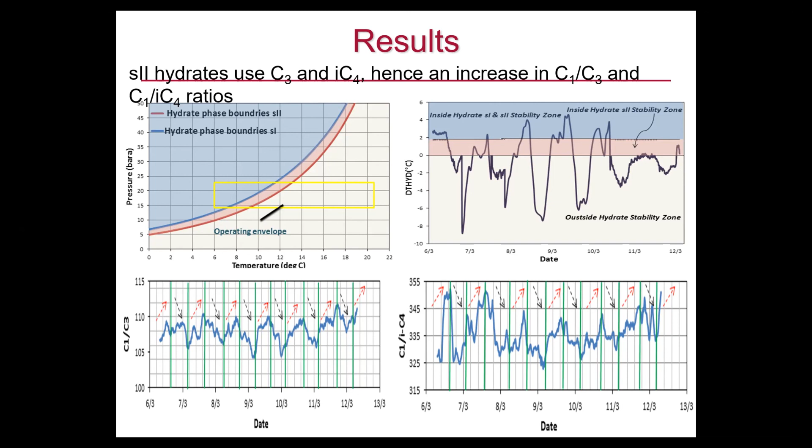Then we realized that it was related to day and night - during nighttime it was forming, during daytime temperature increased and it was melting. So basically, they were injecting anti-agglomerant not for the whole year, but in fact they only needed it for 10 days during the year.